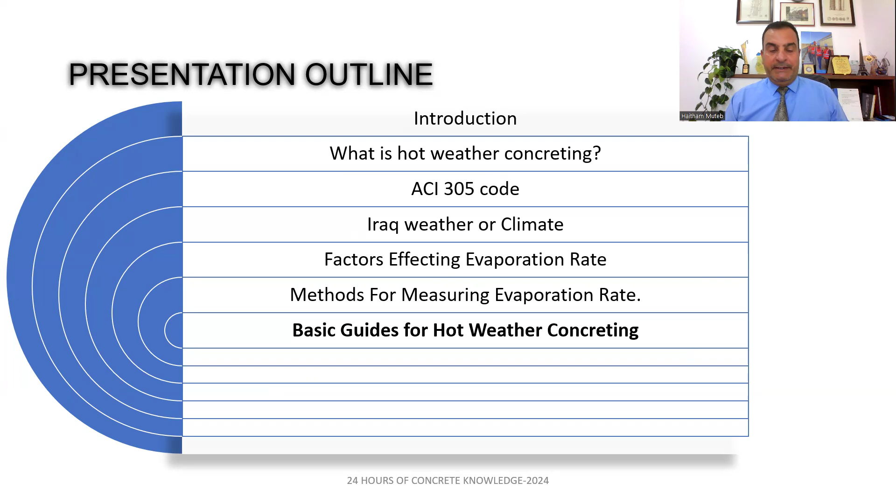Concrete is widely used as a construction material around the world. While it is used throughout the world, it is not without challenges, especially in hot weather. The key of success is to understand how environmental factors affect concrete properties, as well as the construction practices of mixing, transporting, and placing concrete materials.

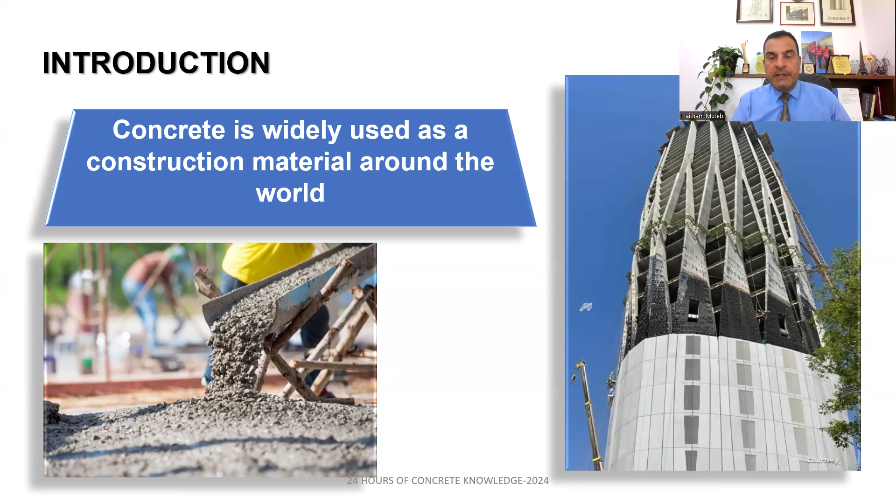Nowadays in Iraq, we have a revolution in construction for residential complexes and for infrastructures, etc. Many parts of the world suffer from hot weather. Hot weather concrete is one of the challenges that affect the use of concrete.

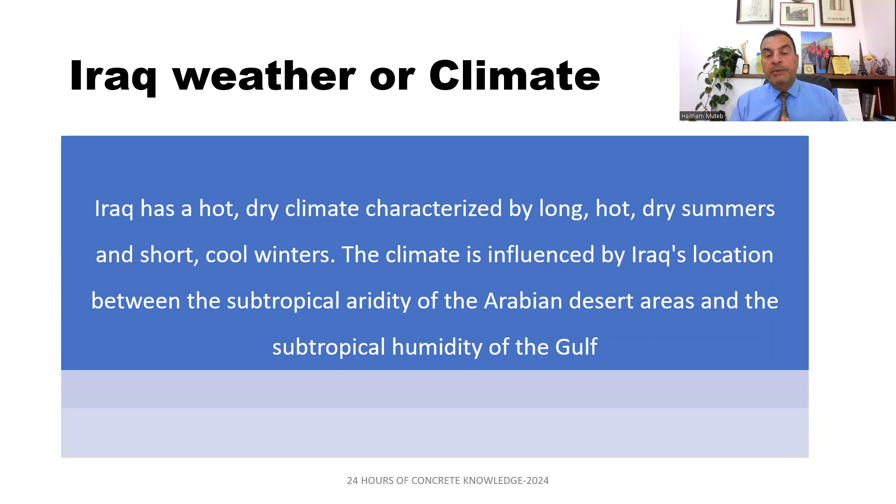Iraq weather or climate: Iraq has a hot, dry climate characterized by long, hot, dry summers and short, cool winters. The climate is influenced by Iraq's location between the subtropical aridity of the Arabian Desert areas and the subtropical humidity of the Gulf at the south of Iraq.

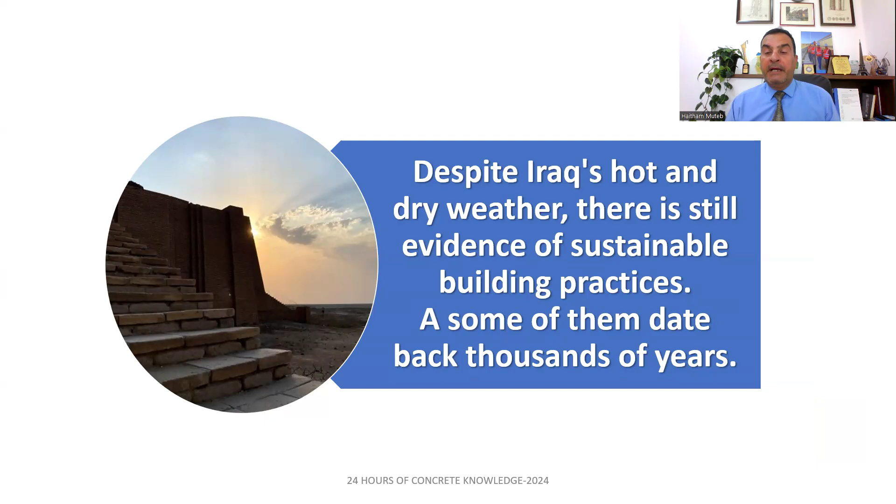Despite Iraq's hot and dry weather, there is still evidence of sustainable building practices, some of them dating back thousands of years. For example, the Processional Street in Babylon still now has stable material. Also, the base of the Ziggurat of Ur, which supports a giant and very heavy structure, still has material which is stable till now. Also, the wall of Nineveh at the north of Iraq.

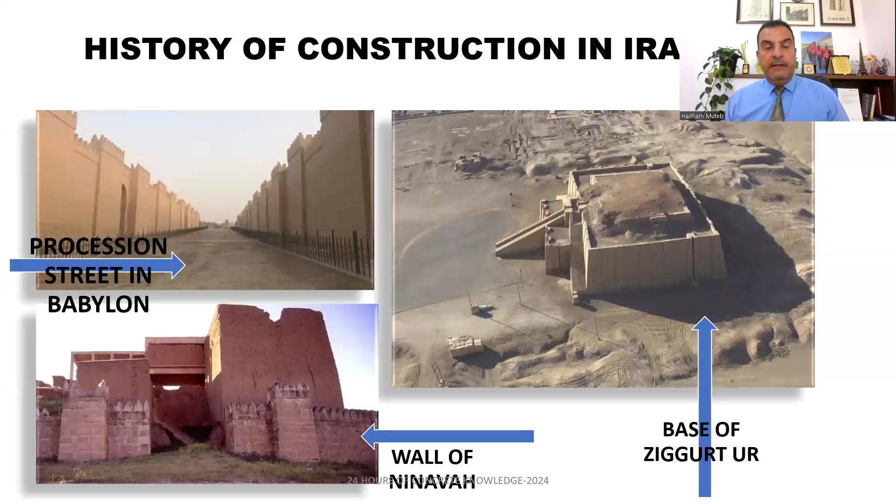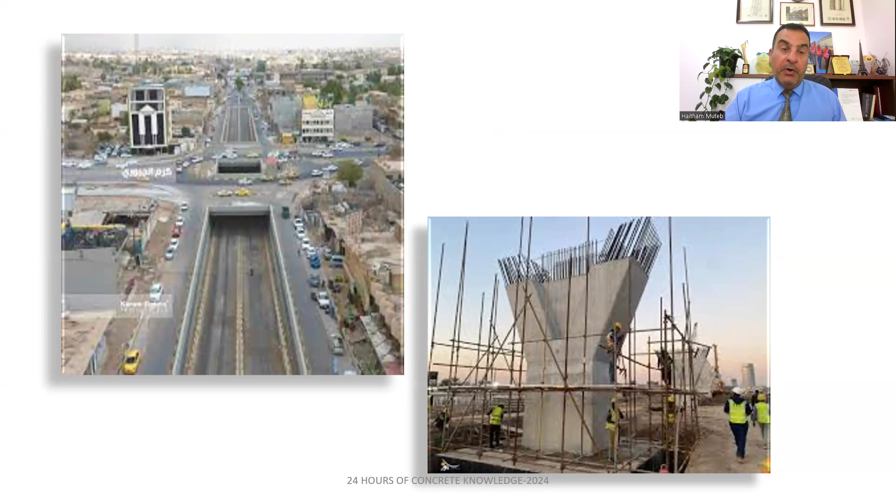Now, many buildings have been constructed and there is need for concrete production during hot weather. Also infrastructures like tunnels, bridges, and roads. Let's take a look.

This is one of the summer days in Iraq. The maximum temperature this day is 44 degrees centigrade, and the minimum will be 31 degrees centigrade. That means we have a 13 degree centigrade variation during one day.

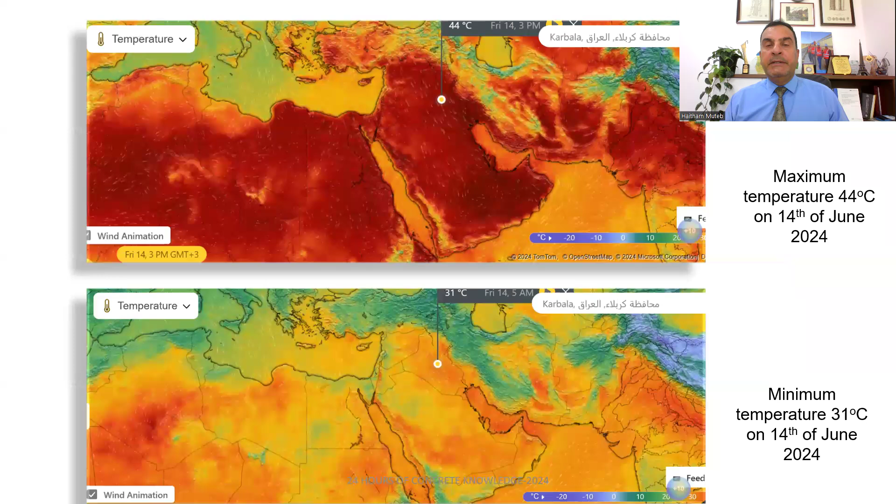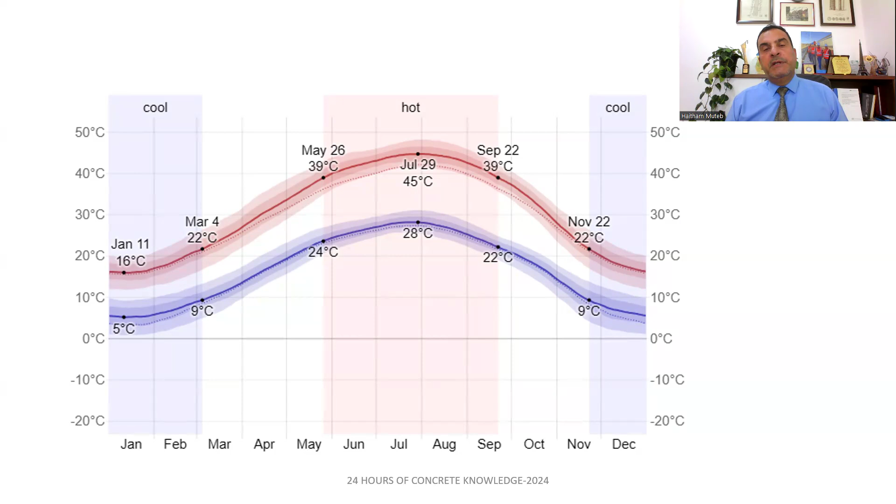Also, let's take a look at the variation of relative humidity in a day of summer in Iraq. We can see there is not more than 10%, which is very low. That means the weather is dry.

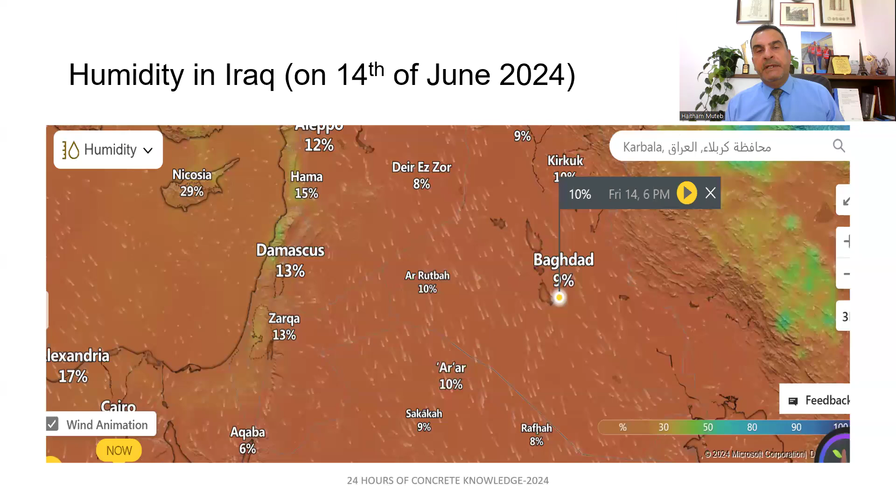From this useful graph, we can depend on it to locate the time and how to construct during hot weather. We must look at this figure. It represents the variation of temperature within the month, also at the day level. We can see from May to October or beyond September and October, the weather is sweltering all day. So we must consider that. If it is not allowed to cast concrete at these conditions, then no construction can be held in Iraq.

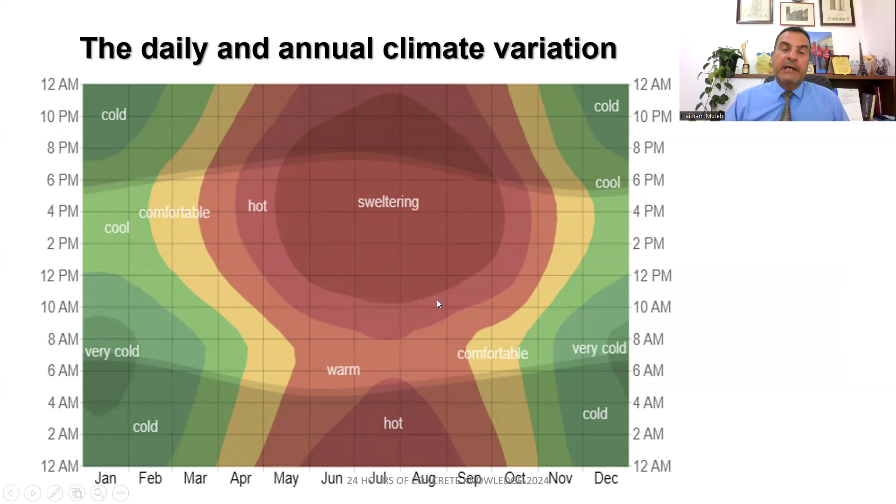The average annual humidity for Baghdad city, from a Google search, showed that the maximum humidity is not more than 75%, and the minimum humidity is about 20%.

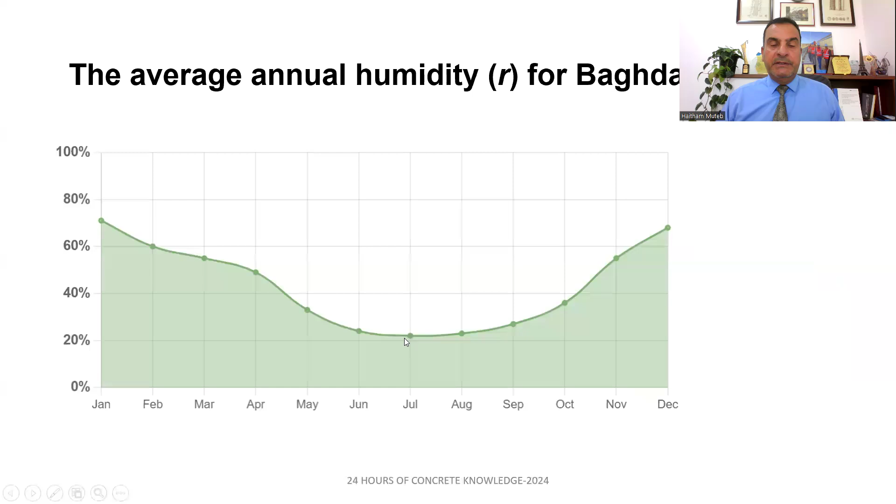Wind speed should not be more than 35 kilometers per hour. The average wind speed in Iraq is about 9 to 10 kilometers per hour, which can be considered not windy weather.

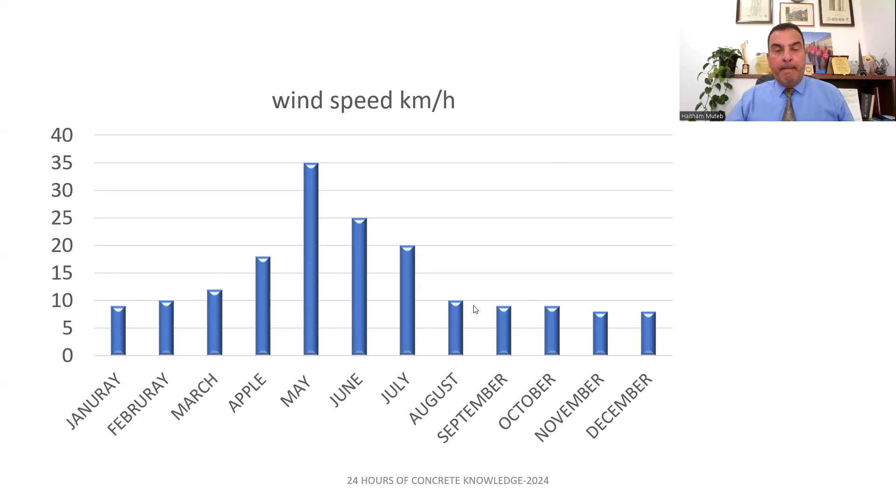What is hot weather concrete? The definition by ACI for hot weather concrete states one or a combination of the following conditions that tend to impair the quality of freshly mixed or hardened concrete by accelerating the rate of moisture loss and rate of cement hydration, or otherwise causing detrimental results.

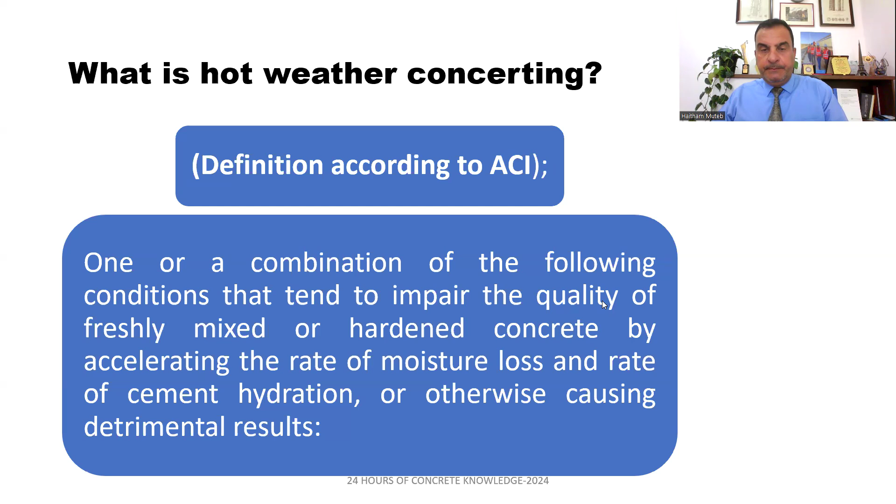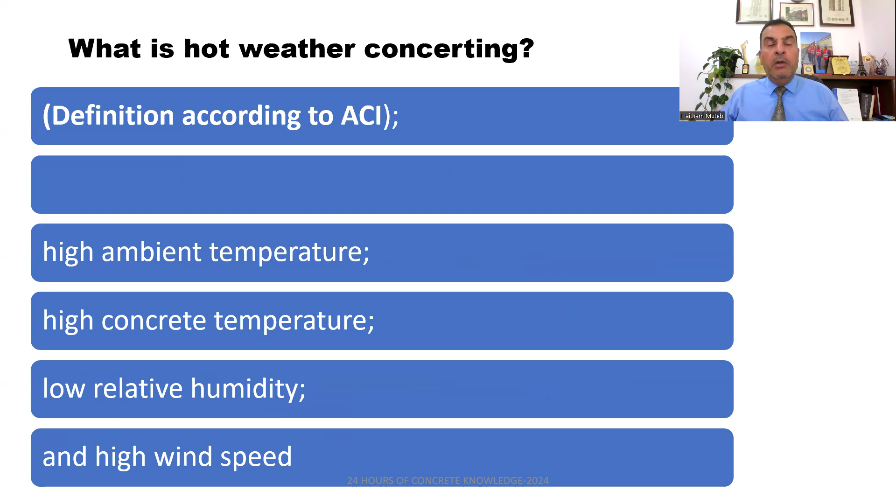From the definition, we must focus on 4 conditions: high ambient temperature, high concrete temperature, low relative humidity, and high wind speed. All of these factors are dominant in Iraq.

The ACI Committee 305 presented a guide to hot weather concreting, in which they define the potential problems and the practice, the effect of weather on concrete properties, and the placing, curing, testing and inspection. Also, they present appendices for estimating concrete temperature and methods for cooling fresh concrete.

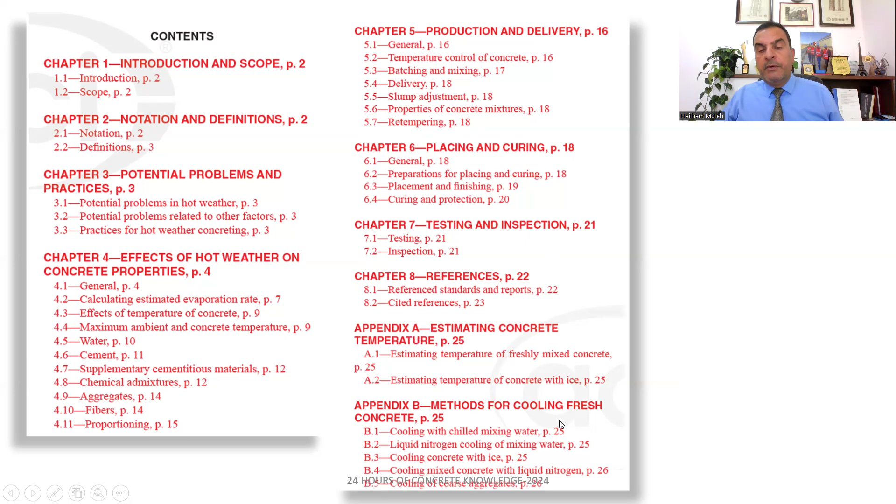Challenges in concrete construction in hot weather can be divided into 4 stages. The first stage is production: the increase of water demand for workability, increased difficulty in controlling entrained air content, and so on.

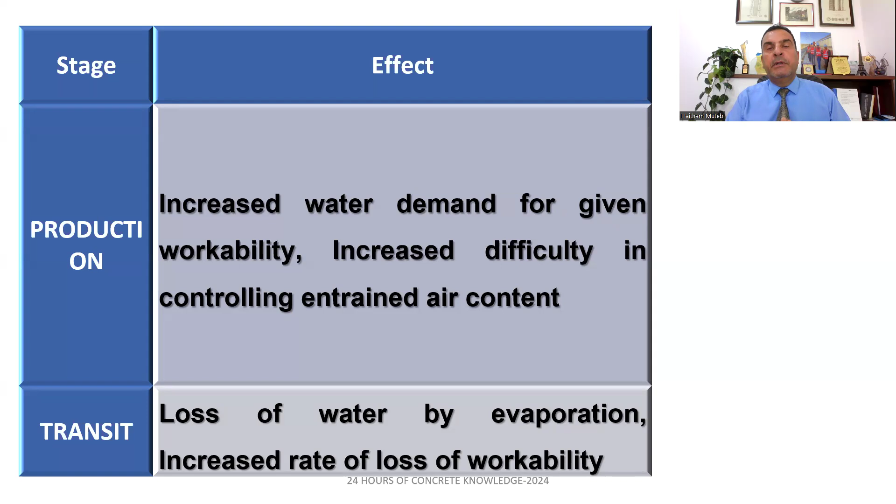At the transit stage, if we want to transport the concrete from the factory to the site, there will be a loss of water during transportation. So we need to cover the truck mixer with sheets, since there is an increased rate of loss of workability. It is not allowed to add any water later, so we must calculate the required water to maintain the desired workability of concrete from factory to project.

The third stage is placing, finishing and curing: loss of water by evaporation, increased rate of loss of workability, increased rate of setting, increased tendency to plastic shrinkage and cracking. Higher peak temperature during hydration leads to an increase in tendency to crack and lower long-term strength, which is the most critical and important issue.

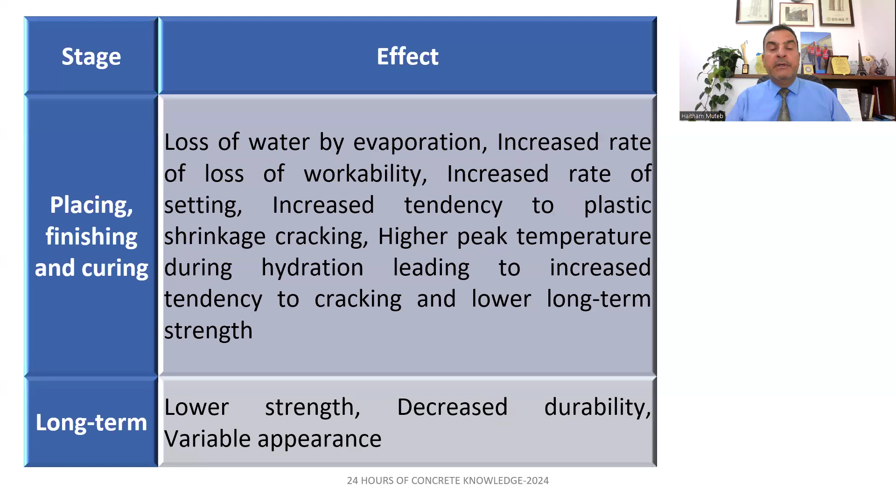Long-term, the effect of evaporation means lower strength, decrease in the durability of the structure, and variable appearance.

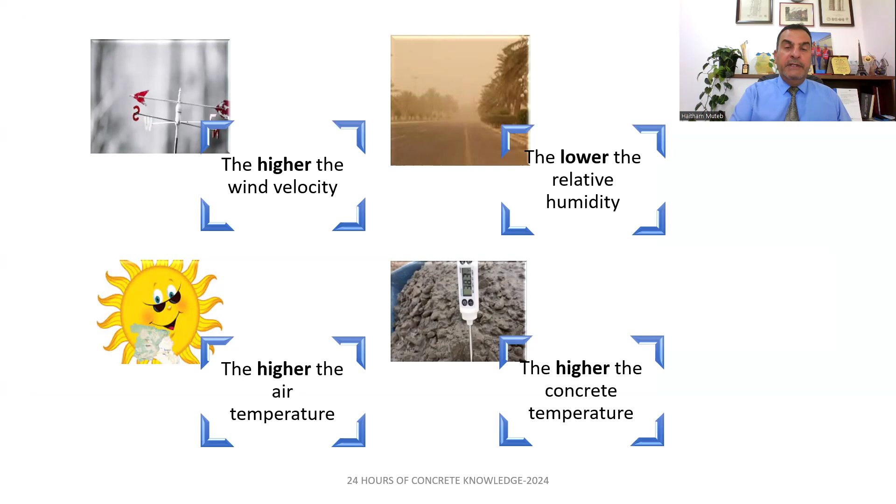The factors affecting evaporation rate can be concluded as 4 factors: the higher the wind velocity, the lower the relative humidity, the higher the air temperature, the higher the concrete temperature - all of these will lead to a higher evaporation rate and higher plastic shrinkage in concrete. Also, early setting time means early concrete hardening and low strength growth.

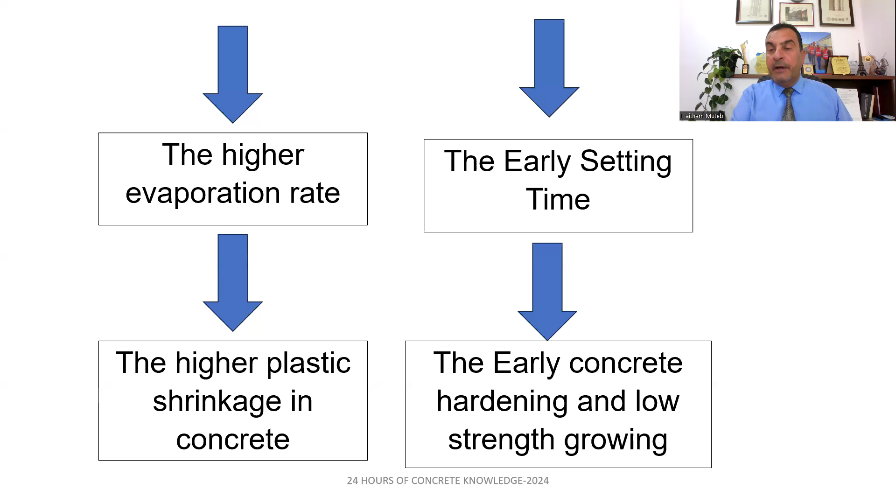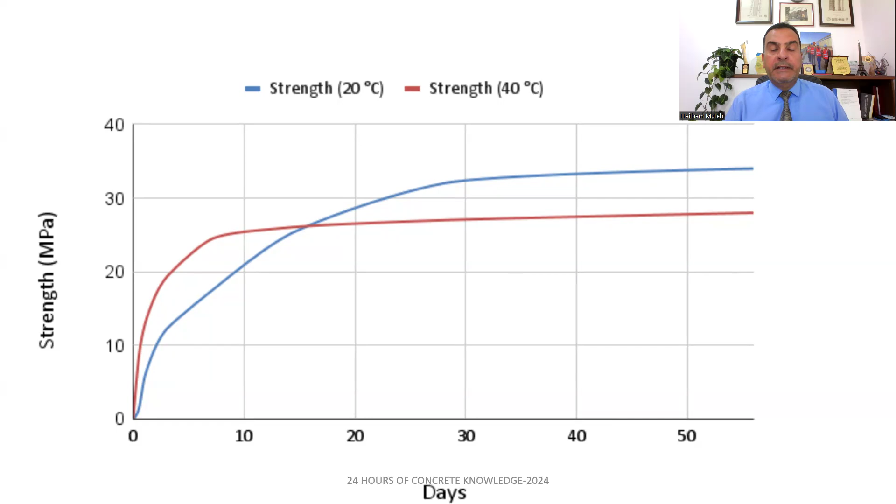The evaporation rate - what is the definition of evaporation rate? It is the rate at which moisture is lost from the concrete or mortar surface, and it affects several aspects of concrete or repair mortar placement.

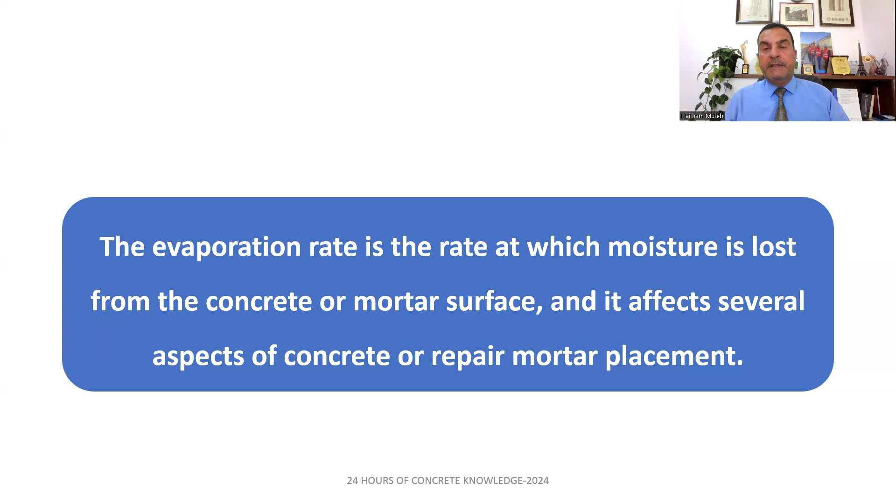Measurement method for evaporation rate: the evaporation rate is measured either using a formula, a nomograph, or online tools.

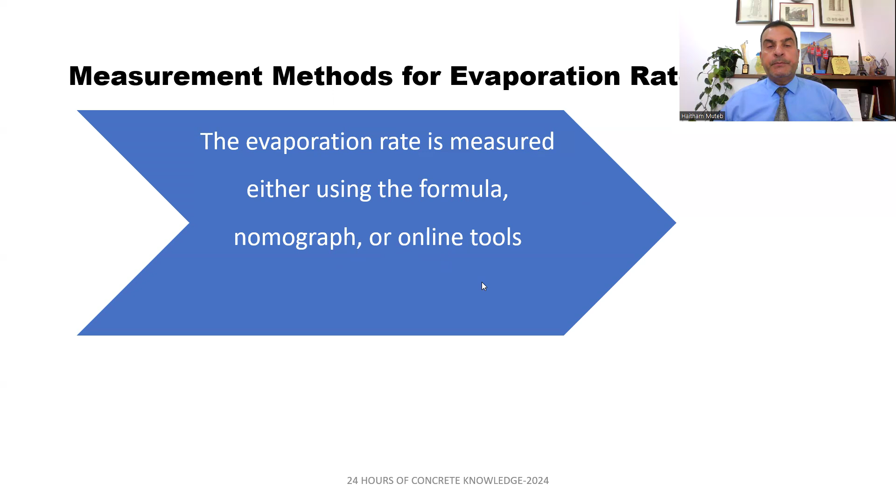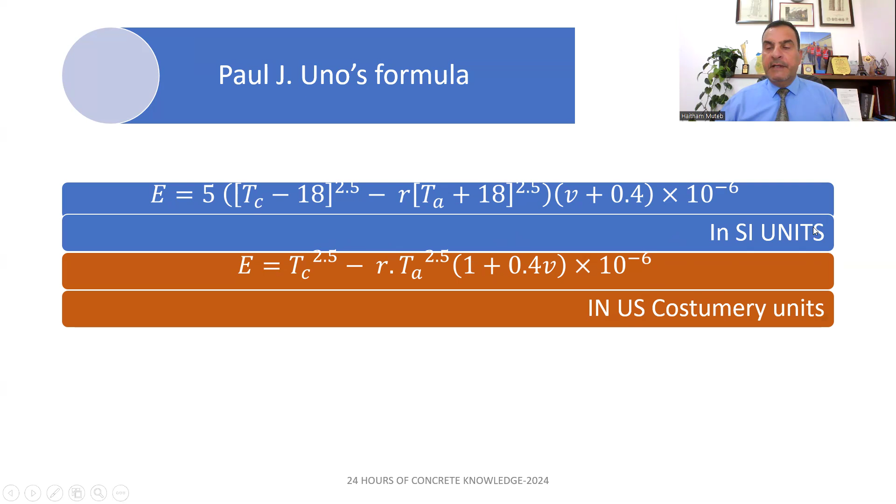The well-known formula used to estimate evaporation rates was established by Paul J. Uno. He presented a formula relating the temperature of concrete, temperature of air, relative humidity, and wind speed in this equation. There are two versions of this equation, one in SI units and the other in US customary units.

ACI depends mainly on the Menzel formula, in which the mass of water can be estimated from this equation, which depends on table 1 and table 2 in the ACI code. Also, two unit versions are presented - in SI units and US customary units.

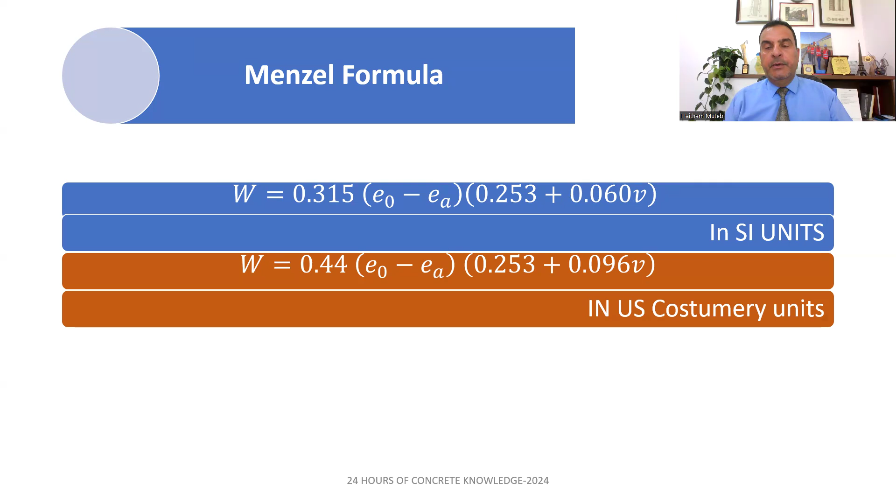When the evaporation rate is more than 1 kilogram, that means the condition of casting concrete is in hot weather condition.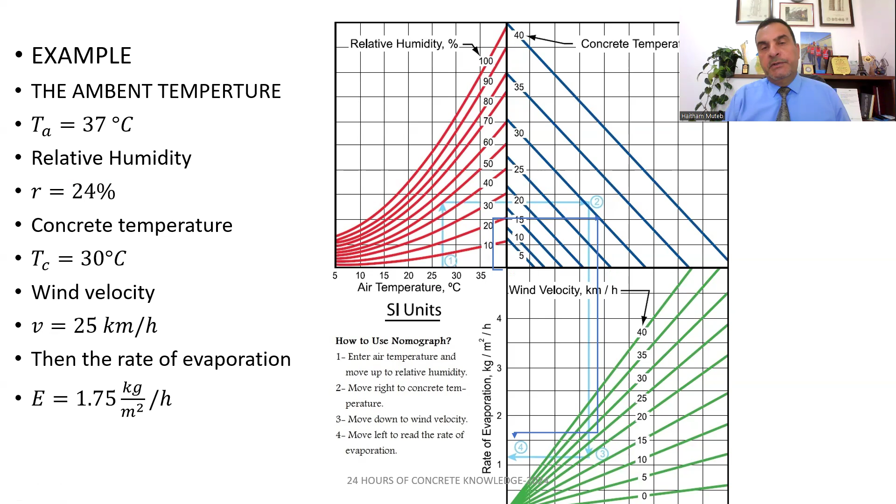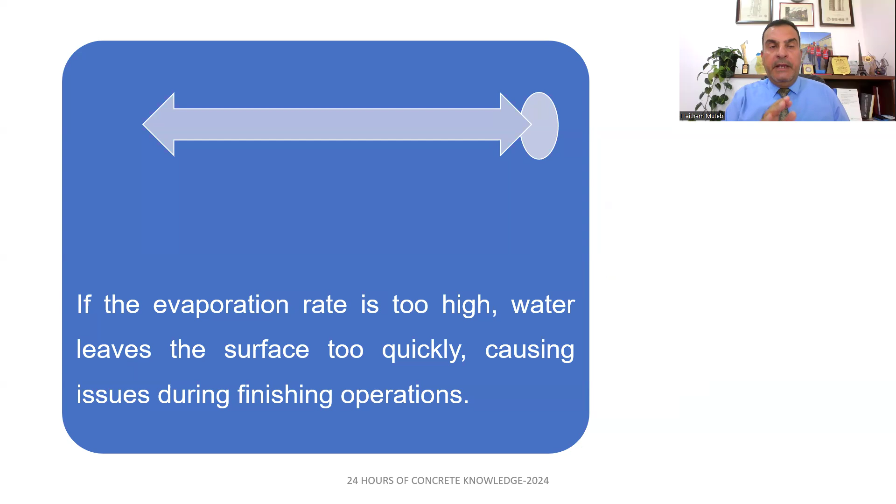If the evaporation rate is too high, this is the result: water leaves the surface too quickly, causing issues during finishing operations. They lose the water, they lose the workability, and so on.

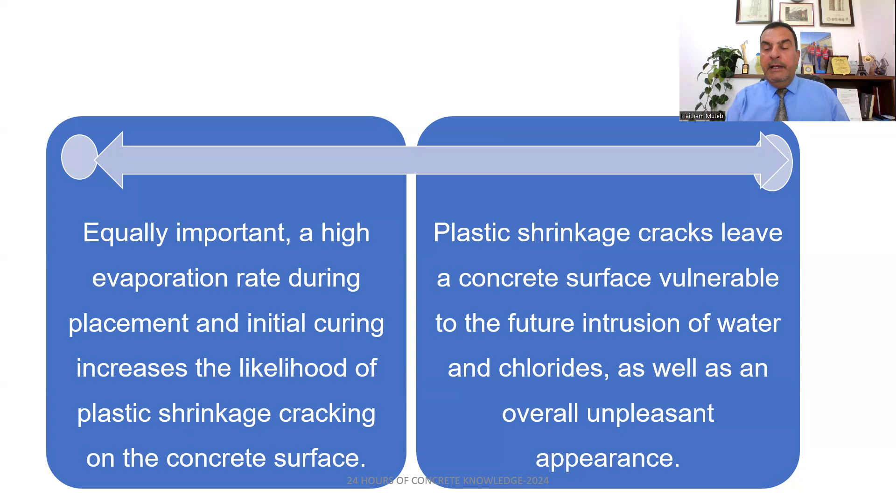Equally important, a high evaporation rate during placement and initial curing increases the likelihood of plastic shrinkage cracking on the concrete surface. Plastic shrinkage cracking leaves the concrete surface vulnerable to future intrusion of water and chlorides, as well as an overall unpleasant appearance.

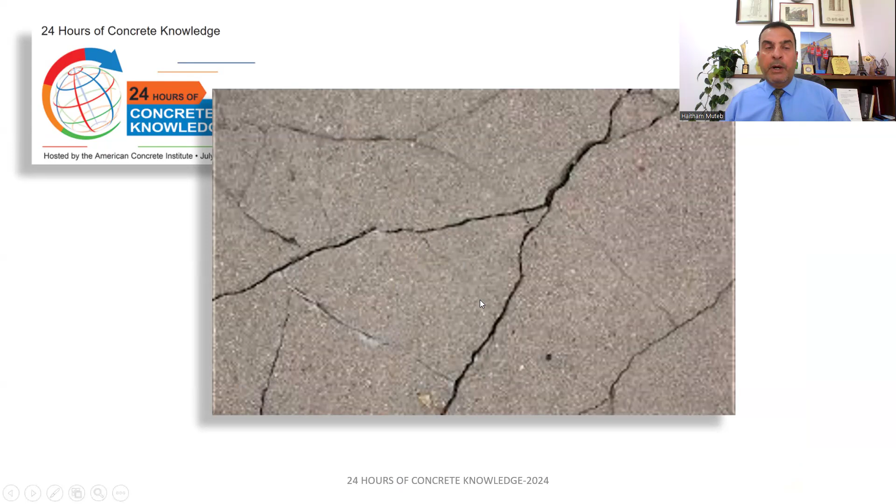This is the result. It's a bad result, not accepted by owners. That means structure durability is not ensured, and repair to the concrete surface is required, which costs time and money.

Let's present some guides for hot weather concreting, useful for engineers, researchers, and concrete producers. The first guideline is to plan in advance.

The material must be prepared: the aggregate must be cooled, along with the reinforcement and molds, etc. Keep the subgrade and forms moist. This is an example from a project in Iraq.

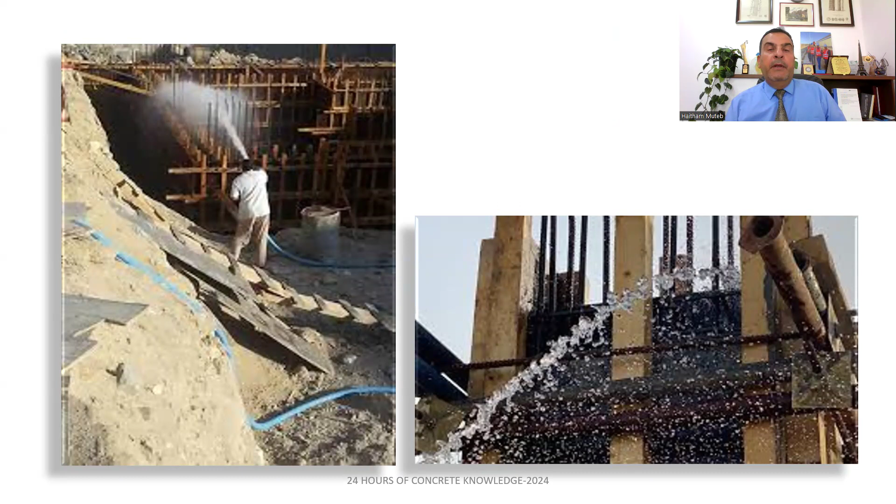Before starting to cast concrete, it's required to decrease the temperature of the reinforcement and make the mold more moist and wet, avoiding and preventing the loss of water from the concrete mix.

Third, keep sunshades and wind breakers available. We can bring some shading to the workers and to the site, and set up wind breakers to reduce the wind speed outside.

Have everything prepared before the ready mix truck arrives. Also, keep in constant communication with the ready mix concrete provider.

We must calculate the time required for transporting, as well as the time required for our workers to finish the concrete at the mold, and arrange this calculated time to avoid delay of the truck mixer at the site.

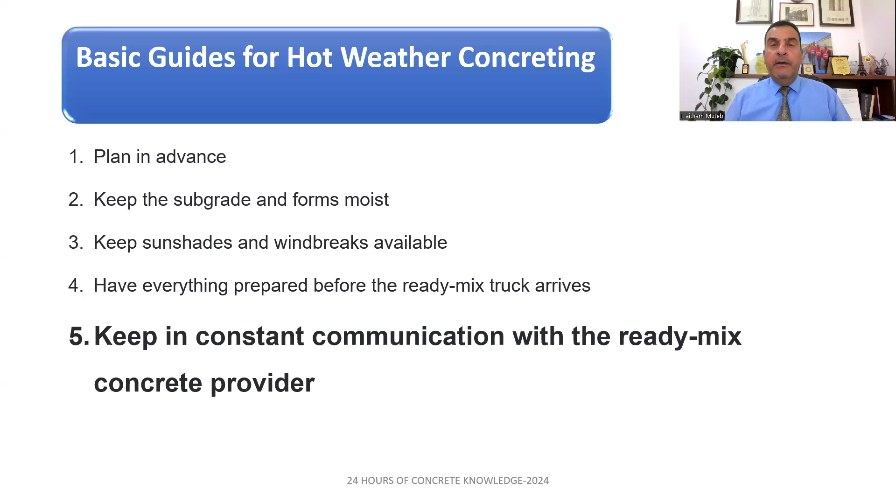Concrete should be placed, struck off, and darbied immediately.

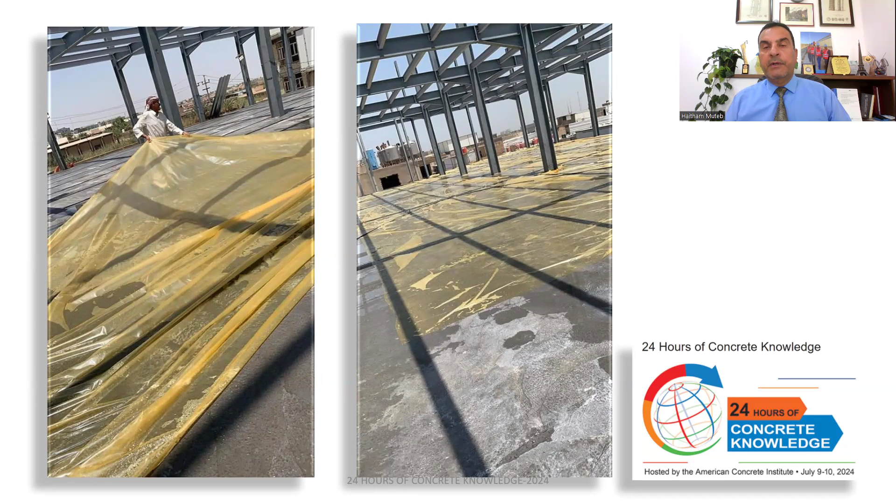Use evaporation retardants, fogging, or misting with water, or cover with a vapor-proof sheet after screeding. In the same project, we used a covering sheet when the concrete started to harden, and kept the surface of the concrete wet continuously with temporary cover like continuously moistened burlap.

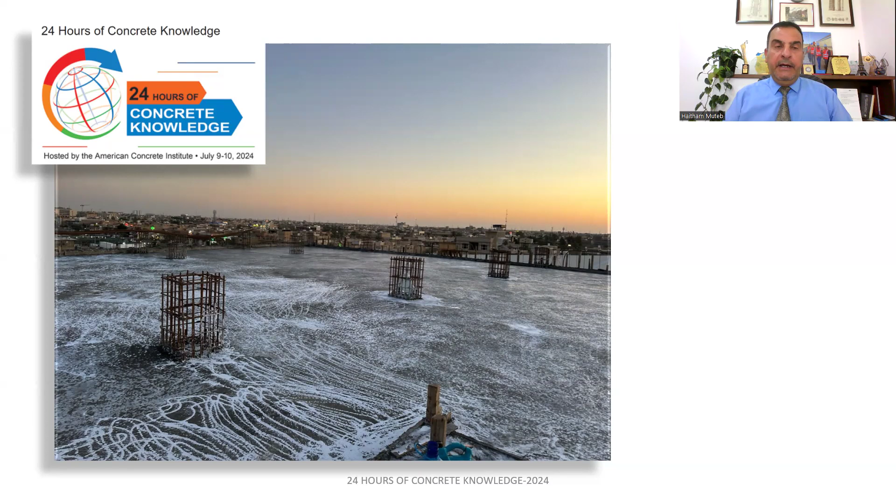Finally, remember to protect the crew in high temperatures. Drink plenty of water and fluids, and be careful with long exposure to the sun.

This is one of our workers. After a hard day of working, he felt very, very, very hot.